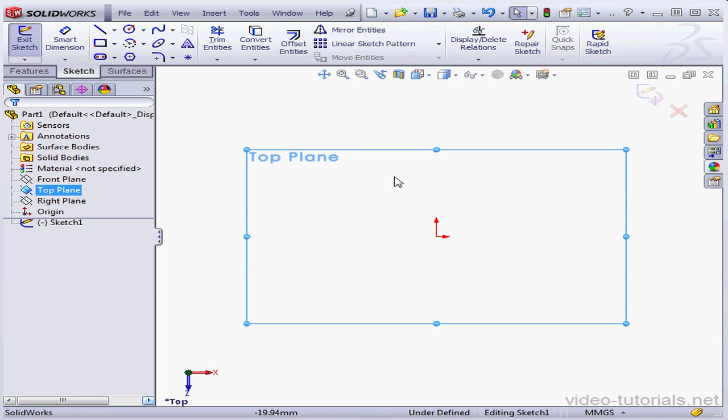Welcome to our lesson about using equations. I'm going to begin by creating a sketch on the top plane. Now let me drop in a rectangle. And I'll smart dimension it. And let's apply some dimensions.

Now instead of entering a numeric value, I'm going to type here the equal sign. Here's a drop-down menu. This is where I can select a function or some file property. Another option we've got is to create a global variable. Let me type the variable name. I'll call it MainDim for main dimension.

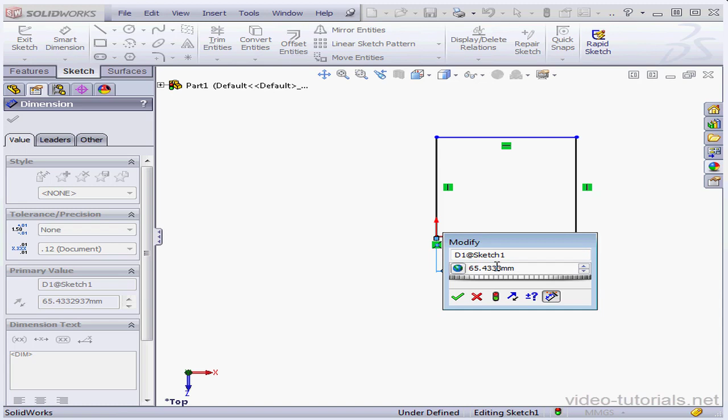Now let's press enter, or you can click on this icon. When I hover over it, the tip tells me this is how we create a global variable. And this icon indicates that we're dealing with a global variable. Let's accept.

And let's apply dimensions to this line. Again, enter an equal sign. Here's the variable we created a few seconds ago. Variables are basically entities that store values. Let's click Accept and Escape to exit the tool.

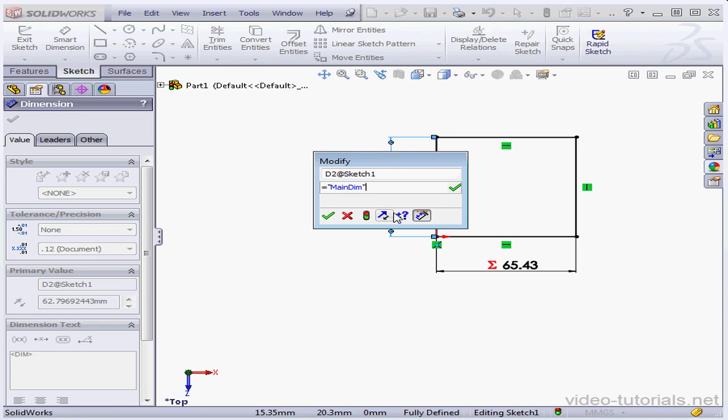Now let's try to change the first dimension. I'll enter a value of 70. Click Apply. As you see, the second dimension changed as well. When I change the second dimension, the first updates also.

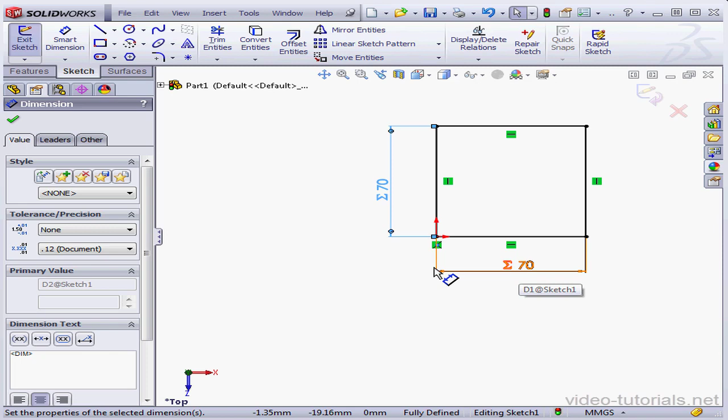And let's create a circle now. Drop it about here, center line. And let's select the center line and then apply a vertical relation. Now smart dimension.

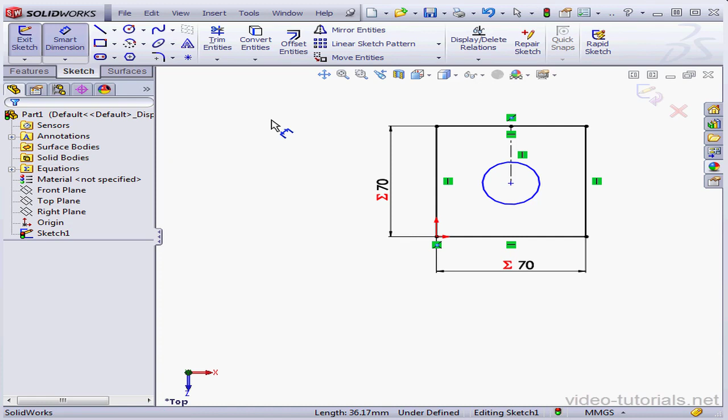This time I'm going to create an equation. Let's start with the equal sign. Global variable. And let's divide it by 3. Accept.

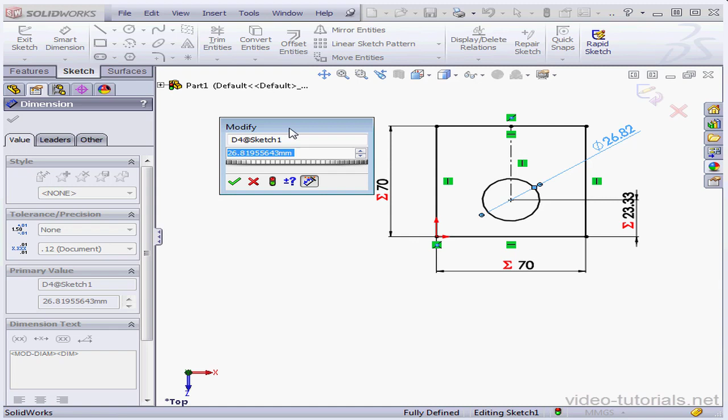Lastly, let's dimension the circle. Equal sign, global variable, and let's divide it by 2. And click Accept. Exit our sketch. Now let's activate the extruded boss base command. Accept the default value and click OK.

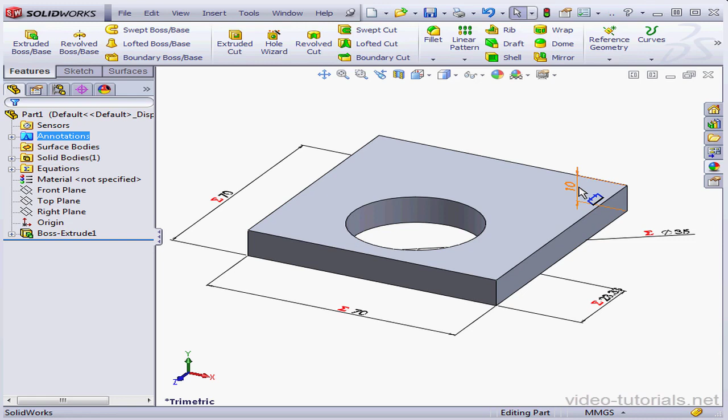Now I'm going to right-click on Annotations and let's select Show Feature Dimensions. Let's double-click on our extrude. Let's insert the equal symbol first. And from the drop-down menu, let's select MainDim and Accept. Let's rebuild now and zoom to fit.

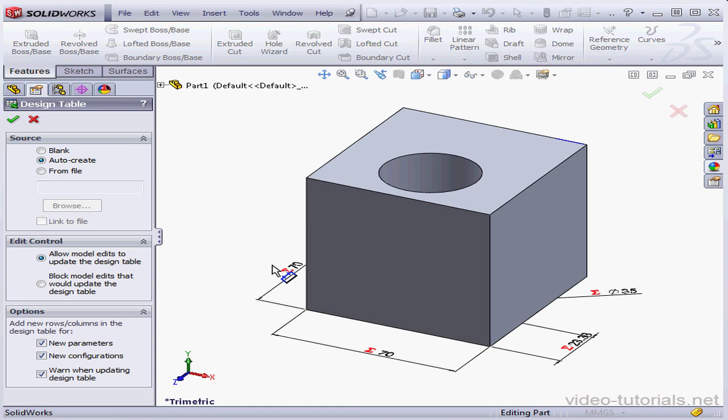Next, I'm going to insert a design table. Let's go to Insert, scroll down to Tables, and select Design Table. Auto Create is just fine. Let's click OK. I'm going to skip the Add Dimension step. In the column B heading, I'm going to type a formula.

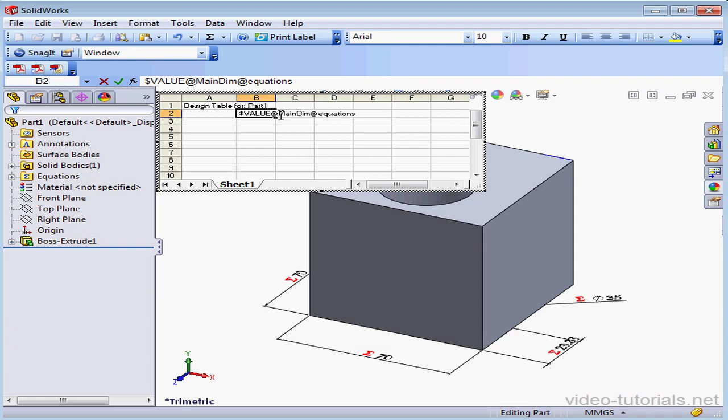So $VALUE@MainDim. Here's our global variable @equations. Let's enter some values in the cells below. Let's say 70, 60 here, and 50 here. And let's click outside to register.

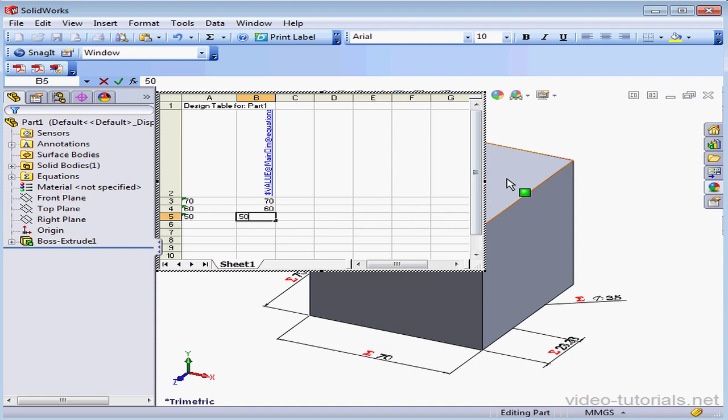SOLIDWORKS confirms that our table has created 3 configurations. Let's test them out. 70 and 60. As you see, all the dimensions have changed. Here's the 50 millimeters. Now let's edit the equation directly. Let's go to Tools, Equations.

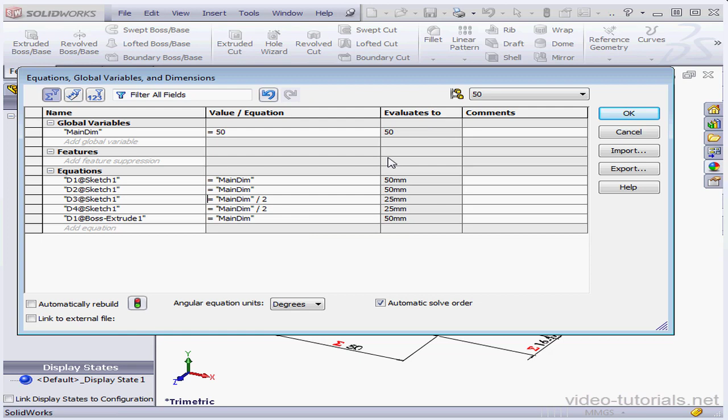Here's our global variable. And here's our equation. Let's change this value from 3 to 2. And the value in the Evaluates To column reflects our changes. Let's click OK. And our hole moves to the middle of this face. This concludes our lesson about using equations.